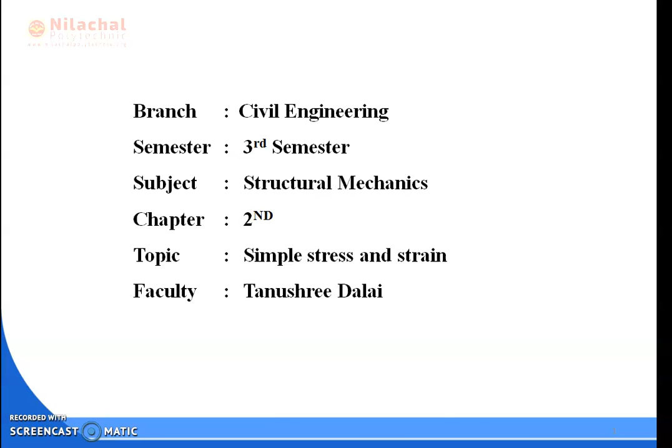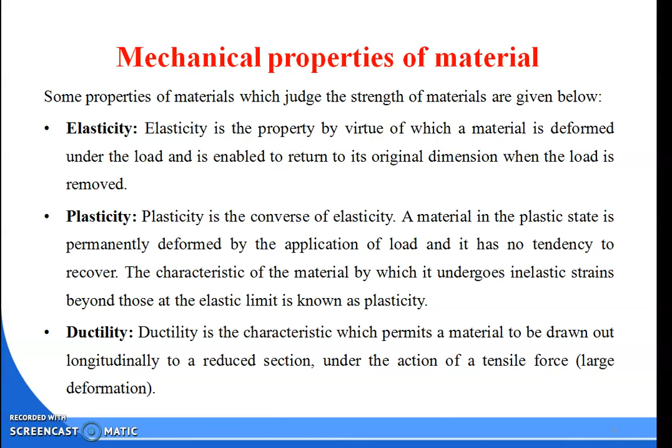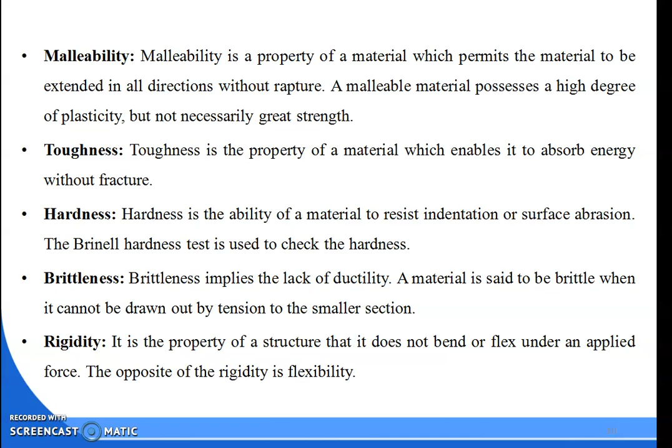My name is Tanushree Dalai from Civil Engineering branch, and today I am going to teach you your Theory 1 paper, which is Structural Mechanics. In the previous class we discussed the mechanical properties of the material: elasticity, plasticity, ductility, malleability, toughness, hardness, brittleness, and rigidity.

So today we will discuss the next mechanical property, which is creep. Creep is also known as cold flow. Why? It is the tendency of the material by which it can move slowly or deform permanently under the influence of stresses. So it is the time dependent deformation when the material is under constant loading.

It can occur as a result of long-term exposure to high levels of stress that are still below the yield strength. So overall, creep is the property of the material by which a body can deform permanently, but in a slow process, due to the loading system. It is a time dependent deformation, meaning day by day, due to the loading, the creep value increases.

And the creep value is always below the yield strength. Yield strength means the maximum capability, or the optimum stress or strength exerted by the object or the body.

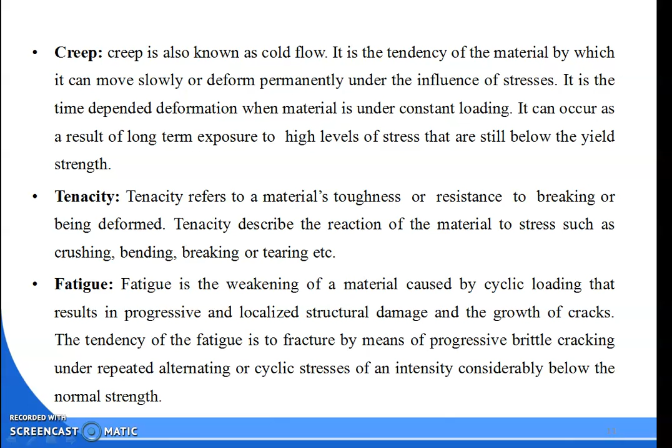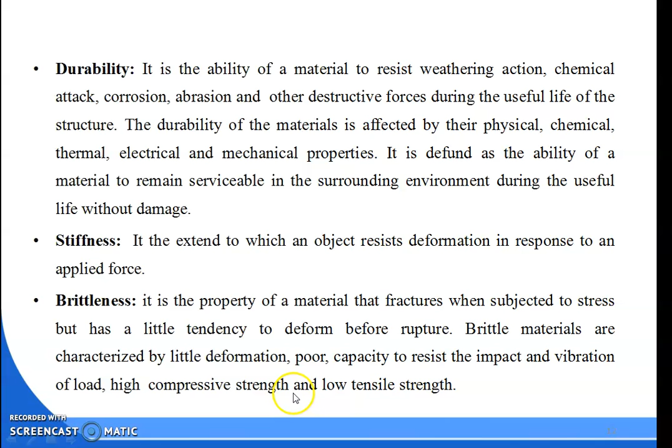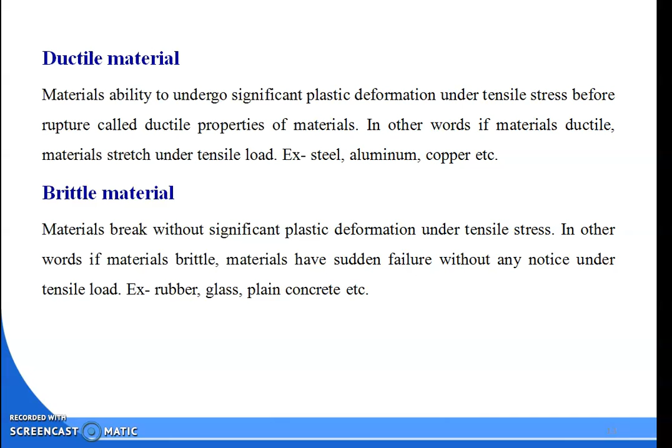Next is brittle material, the opposite of ductile material. A material which breaks without any significant plastic deformation under tensile stress is a brittle material. In other words, it has sudden failure without any notice under tensile load. Whenever the structure under tensile load fails suddenly without notification, it is brittle. Examples are rubber, glass, or plain concrete.

Next is deformation of axially loaded members. We will discuss this part in the next class.